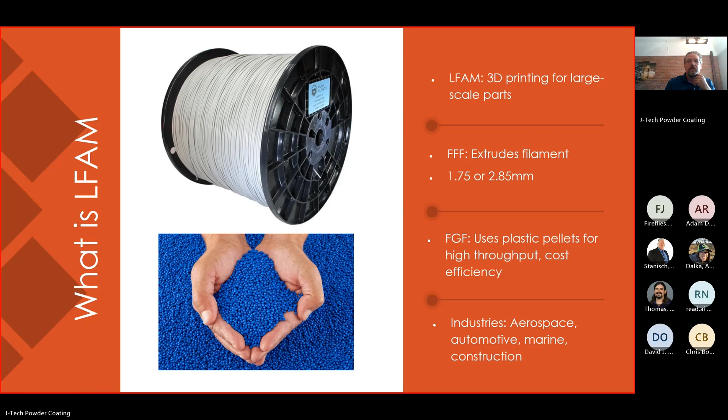So in the quarter to one cubic meter range, these are typically gantry style machines. I mean, there are some Delta configuration printers, but I don't know of any that are larger than a quarter cubic meter. All FFF machines are similar in how the part is created.

Material is laid down layer by layer through a heated nozzle, same way a desktop machine works. The difference is really in the extrusion rate. Desktops typically extrude 10 to 30 cubic millimeters per second, while in LFAM the extrusion rate is up to 200 cubic millimeters per second. There are some very well-known names in this segment, such as Stratasys, Big Rep, and Modix.

But there's also a lot of small manufacturers. The machine on the left is manufactured by Luke's Laboratory from Wrightstown, Wisconsin, and that's priced around $20,000. He's got a nice business going down there. Big Rep sells their studio machine for about $60,000, and the Modix Big 120X, which is a kit, starts at $12,000.

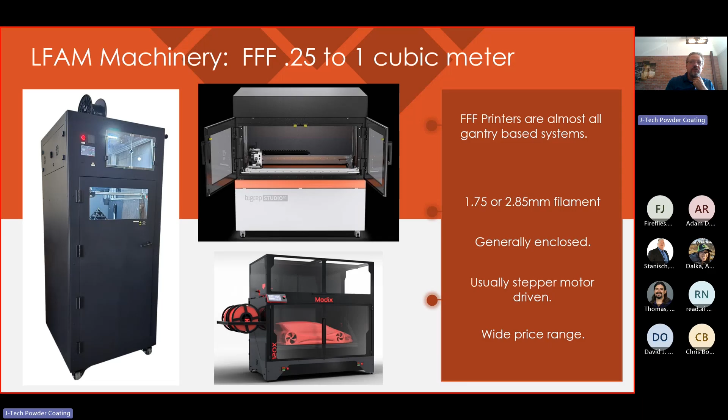Stratasys machines are very well known in the industry, and they're known as the most push-button printer, but they are expensive, significantly more expensive than these. And there's a wide range of features depending on the manufacturer, model, and capabilities.

So the 1 cubic meter market is also typically a gantry style machine with filament or pellet, or a hybrid machine. Hybrid can mean many things in this industry. For some people that's combining filament and pellet printing, or it's combining pellet printing and a router head.

Pictured here is our Compound Dynamics RMC30X. This is a 1 cubic meter build volume. We use Yaskawa CNC servos. It has a heated cabinet, heated filament storage, water cooling, and an onboard Windows PC, so models can be sliced and programmed right at the machine.

This machine can output 200 cubic millimeters per second with filament and over 500 with pellets. Price on this machine ranges from $140,000 to $205,000. There are dozens of manufacturers in this segment, such as 3D Systems, Juggerbot, Big Rep, and several Chinese brands.

Prices in the 1 cubic meter range do vary—as low as $10,000, which is an open air, very lightweight machine, up to $250,000, possibly more.

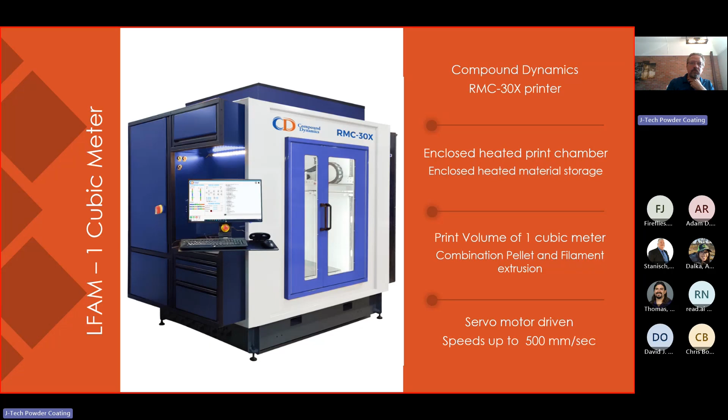So this is getting into more large format. Our size 40 machine is a 2.25 cubic meter. It's possibly the largest fully enclosed heated chamber machine available, but there's always somebody new.

Here in the left photo, you can see this silver dry air component, this is the pellet hopper. All machines running pellets need a hopper for drying out the material. We mount it on the side of the machine to reduce floor space. This is a 15 kilogram hopper, a dry air Arid X10 desiccant style dryer.

With the door open here, this is the dry filament storage cabinet. You have to have dry materials when you're running a large print. Nylon is terrible - if left in open air, nylon will run about 2 hours and then you can't print with it. Prices on this machine range from $220,000 to $305,000.

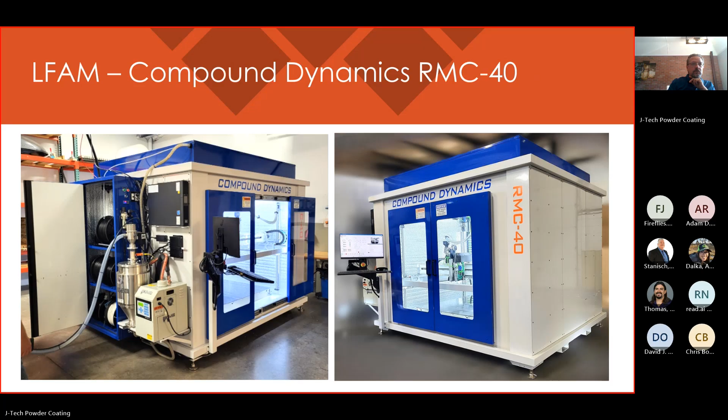End of arm robotics are becoming much more popular. It's a growing segment, probably because of their versatility and very large build volume to price ratio. The two most well-known names in this segment are CEAD and Caracol, although there are quite a few others.

They can be programmed to work with standard slicers, but typically they're using a 5-axis slicing software such as AI Build, so they can do non-planar printing. Prices in this range start probably at the low end of $125,000. The system on the right is in excess of $500,000.

The big advantages with a robot arm is you can do non-planar printing, you have very large envelopes, and your ability to utilize a router head on the same machine. I believe in the back of this photo on the right, that is a router head on a stand, so the robot can go over there and switch heads.

The disadvantages of robotic arms are the overall accuracy. They will follow a tool path, but your actual positioning of the extruder head is not as accurate as a gantry style. And all of these machines print in open air, so they have to have materials that have the ability to do that. Material developments are continuously changing, and they've come up with some formulations that work very well.

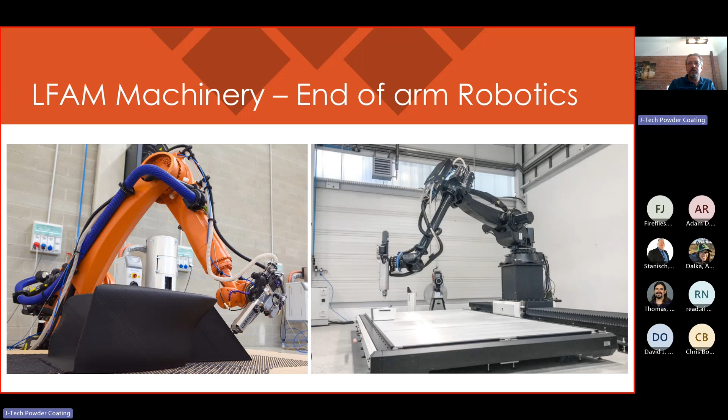Cincinnati Incorporated actually produced the world's largest 3D printer through a collaboration with Oak Ridge National Labs in 2014. The print volume of this series went up to 8 foot by 8 foot by 22 foot with pellet extrusion rates of about 50 pounds an hour. So Cincinnati pioneered the mega-sized large format 3D printing. Unfortunately, they exited the market in 2022, and they no longer produce anything in additive.

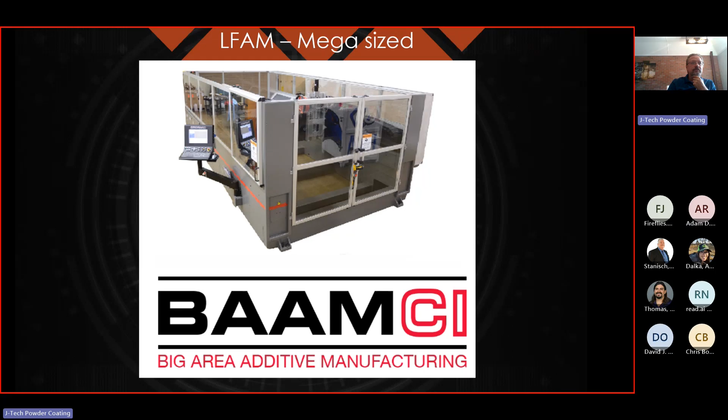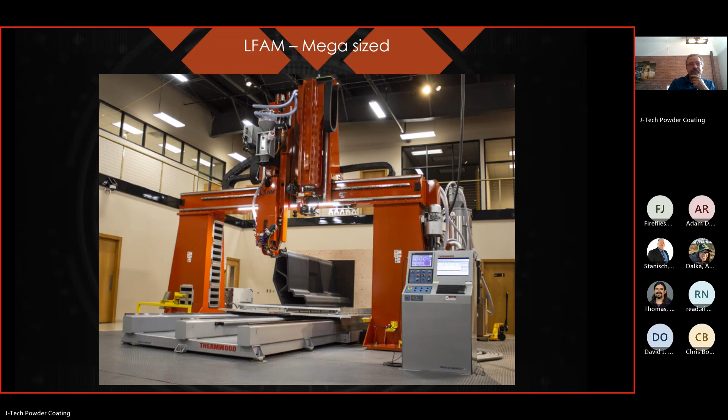They're currently printing at a 500 pounds of material per hour rate. Their goal is to hit 1,000 pounds per hour. They're utilizing these machines for a lot of government contract work, boat hulls, wind turbine blade molds, and other supersized prints. This machine is priced in the millions.

We can't talk about LFAM without talking about concrete. There are larger printers than the Masterprint, but they are not in the composites category. They're using a concrete mixture to print buildings and houses in a layer by layer system that's very similar to composite extrusion, but a very different medium.

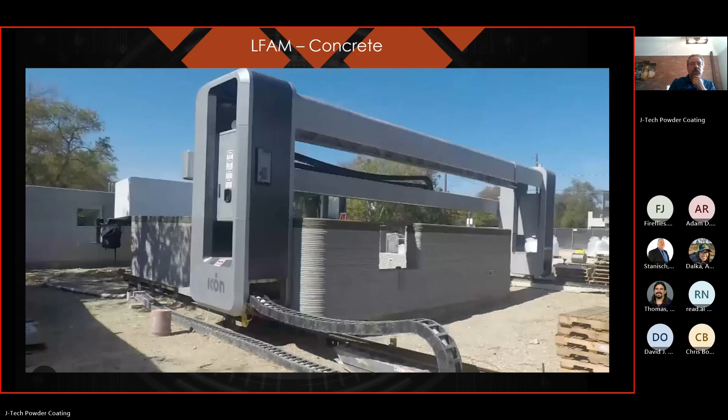At the time this was done, I think it was 2019, it was the largest solid 3D print ever produced. They've produced 2 more - in fact, I think they just finished one last month. The university is also using the machine to print shelters for the military, bridge molds, wind turbine blade molds, etc.

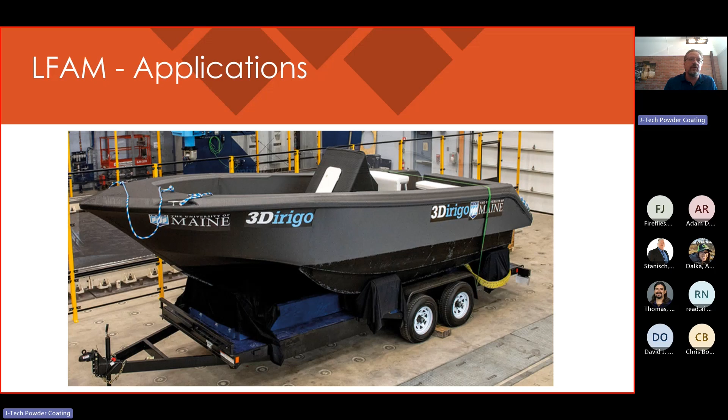Engineering prototypes is still probably the most common use for large format. This is a filament print being done on our RM30. We produced 2 of these to do a test fit and function of the parts for a local company before they invested in final tooling. This is a 1.8 millimeter nozzle with a 0.6 millimeter layer height. Total print time on this was about 28 hours, and this was done with filament.

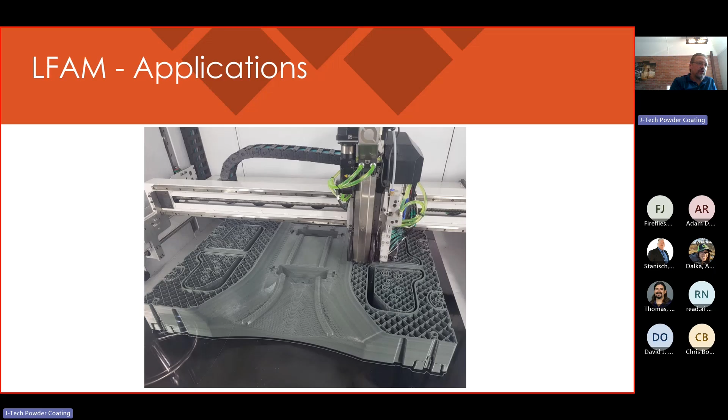There is also final use parts. This is a stator and housing for a hydroelectric power plant in Wisconsin. Cadence LLC is located in southern Wisconsin, and they are pioneering low head hydro for smaller applications. It's a neat group of guys doing some pretty interesting things. The material for this is carbon fiber ABS printed with a 2 millimeter pellet nozzle.

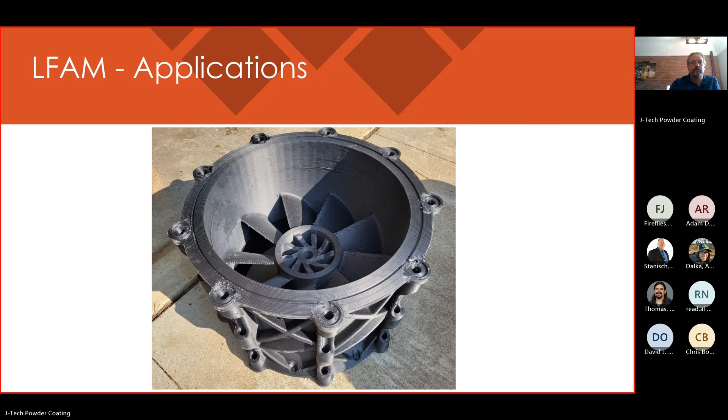There's also final use tooling. This is a punch and die for forming 040 aluminum knee braces. These are nearly solid and took days to print, but the total cost of the print was less than the cost of the aluminum billets they typically produce these from. So it was very economical for them.

This is short run production. They took a long time to print because they were done with a 0.6 millimeter nozzle due to the fine details. It probably would have been more economical to produce them with FGF to a near net shape and then clean up the surfaces in a 5-axis mill. Or actually a 3-axis mill, since they're all straight down. But this is a good example of short run tooling. They can actually run a few hundred parts with these PLA dies.

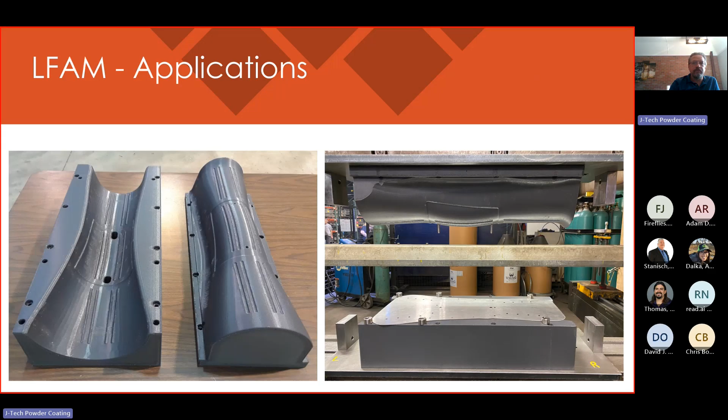Prototype. This is a prototype vacuum mold being done by one of our customers. This customer was purchasing 90 wooden prototype molds a year. Due to the heat of the process, they were only able to form about 10 parts on the wood mold before it was ruined - it would delaminate. So we did some work with them using ABS carbon fiber, and with this material they can do 50 prototype parts before the mold is shot. So it's a big advantage for them.

Their final tooling that they make a mold from is made from aluminum billet, but 3D printing allows them to produce the tooling in-house, resulting in shorter lead times, faster development, and better performance of the product. Their payback on this machine is only about 18 months, so very economical.

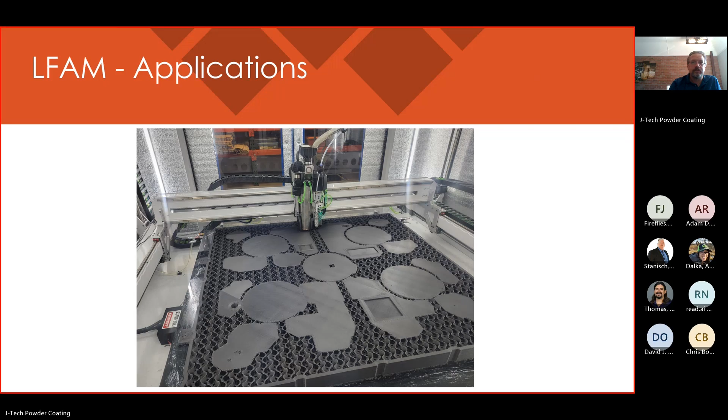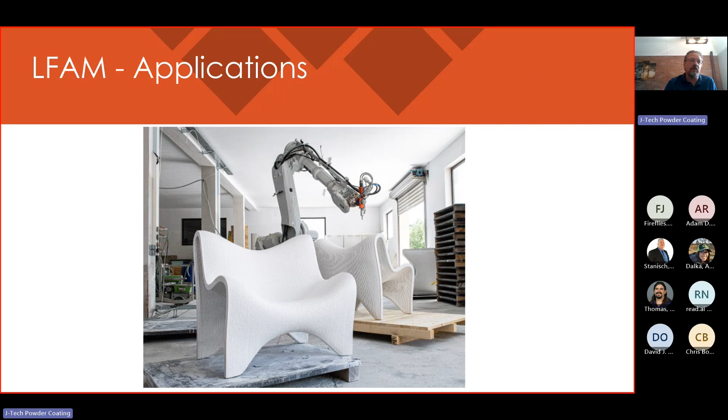Furniture. There are several companies out there now producing 3D printed furniture. I think most of them are using robotic end of arm tooling. The advantage is the ability to produce never before seen shapes, tailor sizes to individuals, and produce on demand, shipping local. Pricing on these is typically in the high-end furniture category, but I think that's going to be coming down over the years as material prices and technology advance.

UAVs. 3D printing is great for fast design development and complex shape production. UAVs can be quickly, cheaply, and produced on site for many applications. It provides great advantages over traditional manufacturing methods. A large printer can be located nearly anywhere and produce the structural components as needed - that really isn't possible with a large injection molding machine.

Materials. LFAM uses filament and pellets pretty much. When printing a very large model, the material cost becomes significant. Printing with pellets opens up a lot of opportunities for cost savings. With prices around 1/10 that of filament, large models become much more economical, and the more quantity of pellets you buy, the lower the price goes.

There's a lot of testing taking place to utilize the lowest cost materials available, mixing something like an injection mold grade, which is high volume and low price, along with an additive manufacturing grade at a 50-50 ratio to reduce the cost of materials more. I'm not going to talk too much about materials unless someone has questions - there's hundreds available.

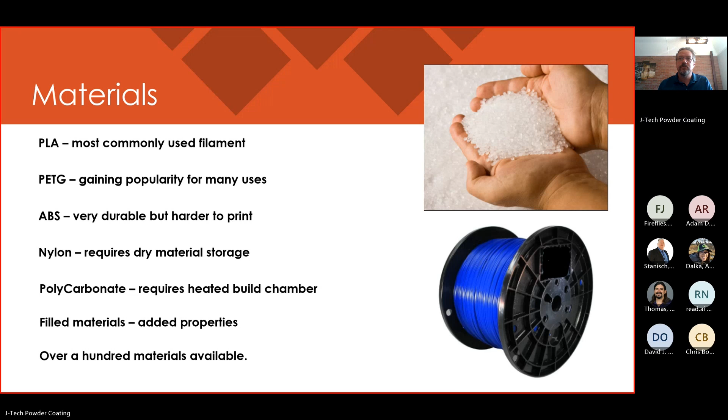On resolution, you've got to think bigger when you're doing LFAM. For printing large models, the number one thing you can do to reduce print time and cost is increasing the layer height and nozzle size. A desktop printer is going to have nozzles of 0.2 to 0.6 millimeter diameter, with 0.4 most typical. Layer heights range from 0.1 to 0.3 millimeters. That's great for creating small detail parts, but results in large parts taking excessive amounts of time - think hundreds of hours.

Our machines run a filament extruder with a range of nozzles from 0.6 up to 2.4, printing much thicker, stronger walls with increased layer thicknesses and high deposition rates. Selecting the largest nozzle size that will work for your model is the way to get your time down.

The pellet extruder has 3 nozzle sizes. They start at 1 millimeter, run 3 millimeters most typical, and 5 millimeter on our machine. The wide spread of sizes means you have a wide range of resolution to choose from. Generally your layer height is going to be 20 to 80% of nozzle diameter - we've done some that was 100%. This allows for a lot of range when programming.

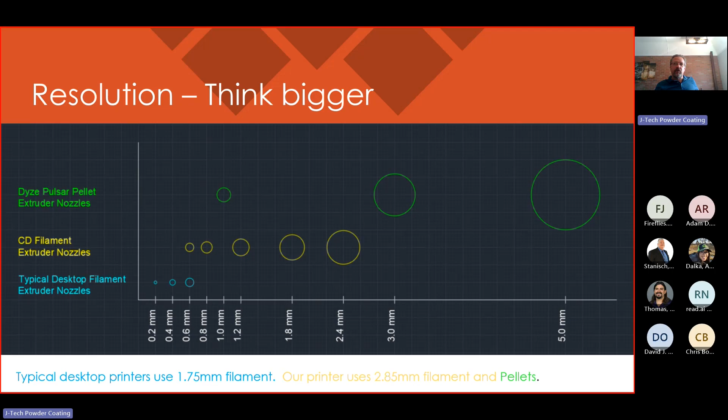Here's what those nozzles look like in real life. You can see the desktop nozzles on the left side. The copper colored ones are the filament, and the silvers are the pellet extruder.

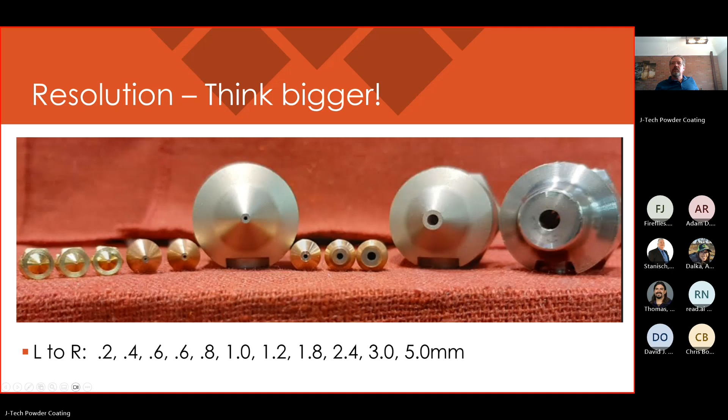So for resolution, think bigger: the thicker the layer, the fewer layers there are to print, and you get a quicker model to produce. Baby Groot on the right was printed with a typical 0.4 nozzle and a 0.1 layer Z resolution. You can see the fine detail this produces—even the tree rings and the feet are distinguishable. But this level of detail comes at a cost of time. Detailed Baby Groot is about a 12-hour print.

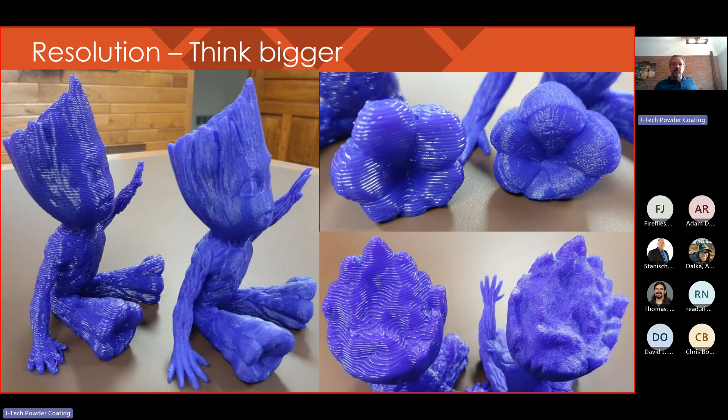On the left is the exact same model printed with a 1.8 nozzle and a 0.9 layer height. You can see the overall shape is definitely identifiable, but the details are lost. This is only a 1 hour print. So you have to select the resolution that produces the desired results for what you're producing.

Now, if you scale the baby Groot up 600% and the layer height were set to 0.6 millimeters, the details would be equivalent to the larger nozzle and layer height. And the print time of this model would be about 36 hours.

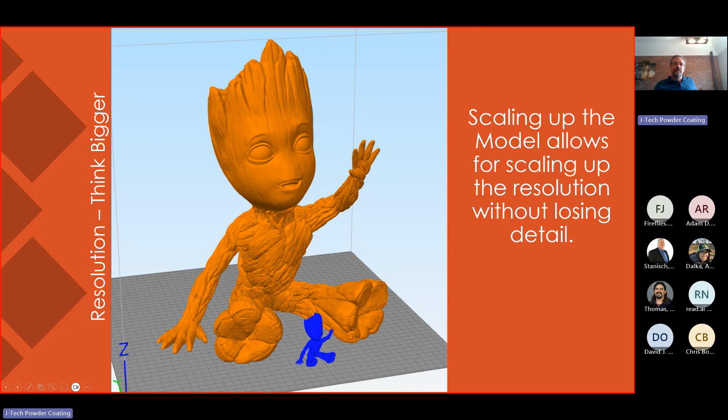Printers with very high extrusion rates also have much larger nozzle sizes and print much thicker layers. This is the Strati, the first 3D printed car, being printed on a CI BAM with a half-inch nozzle and about a 3/16 inch layer.

The resolution is not the most attractive.

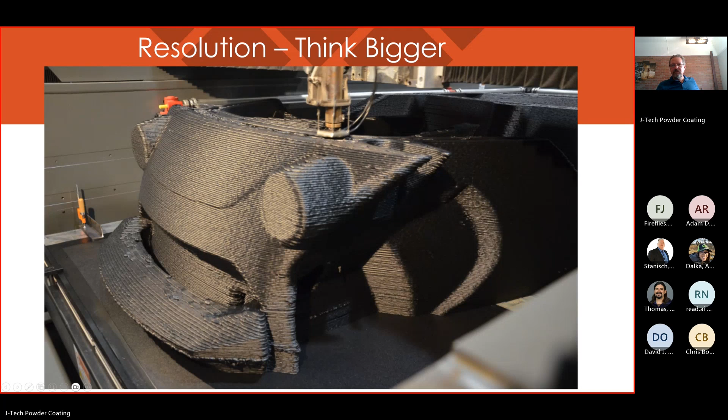Here's the finished product. There was some machining done to fit the lights and other hardware and to clean up the hood, but the overall surface was left as printed to highlight the manufacturing process. Nearly all models completed with high extrusion rates are going to be machined for cleanup—they are really a near net shaped part.

All printing has similar considerations for layer time and cooling. If your layer times are too short, the previous layer may droop. And if your layer times are too long, it may cool down to the point where adhesion is poor, resulting in delamination.

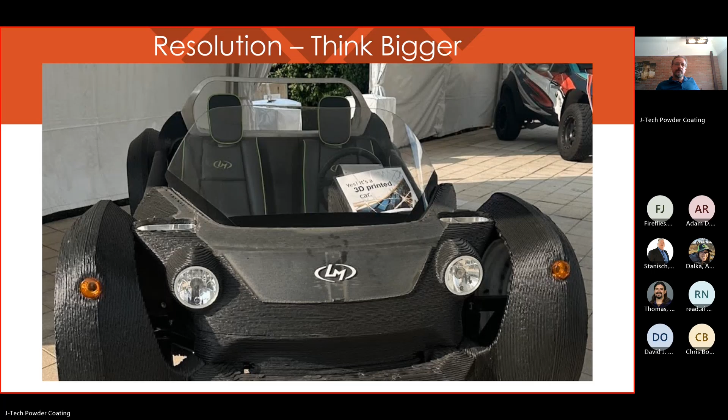Here's a closer view of that body pictured earlier. You can see a marked difference in the surface finish. Things have advanced a lot in the last 10 years, but the surface is definitely not smooth like a typical fiberglass body. So the adoption of as-printed large objects is going to take some time. How suitable would this surface be? How suitable is this surface finish for a lot of other applications?

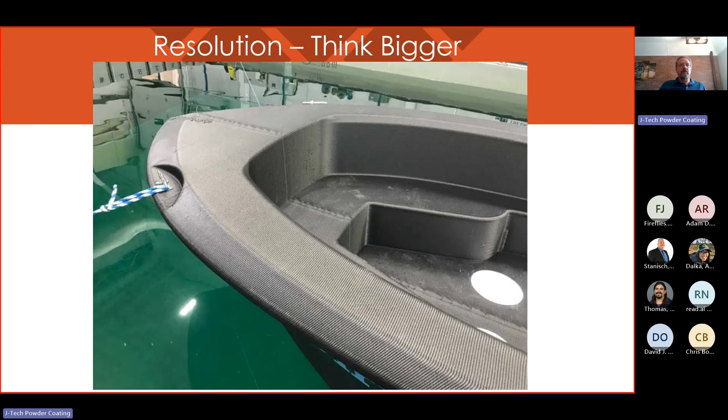The printing workflow for LFAM is pretty much the same as a desktop. Bed prep may be very different. In the really large format, some machines utilize a sacrificial bed board, or they'll print directly on plywood or directly on aluminum. So being a very large format does have its own challenges.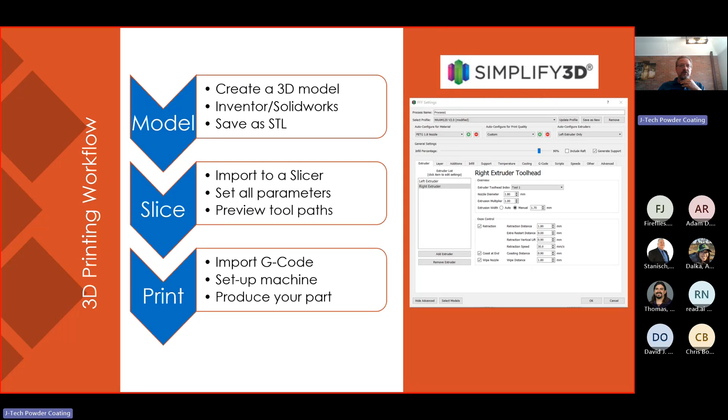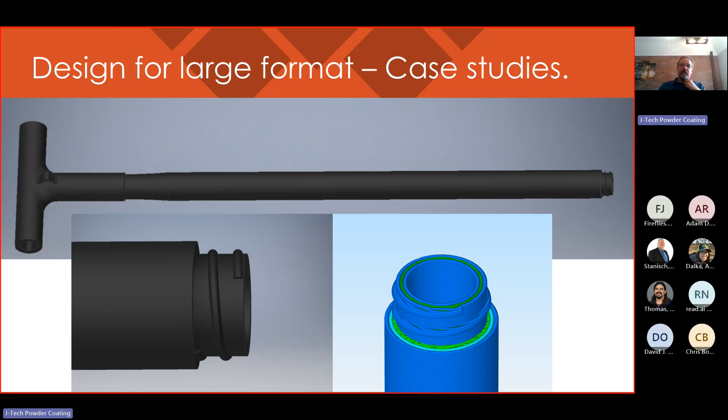So into a case study of how to design for a larger format print. Here's the original handle presented to us by the designer. It looks good—it was designed for a specific purpose. The fine features of the thread required the part to be printed with a very small nozzle and a small layer height, and it had to be printed vertically, which also slowed things down. We were able to print it, but it took too long.

This is the mating part with that. The grill slot profiles and the fine thread required a lot of passes, but it's very printable with a fine resolution. But one of the requirements was to print a pair in less than 2 hours. These initial designs took about 10 hours to complete. So this was a challenge.

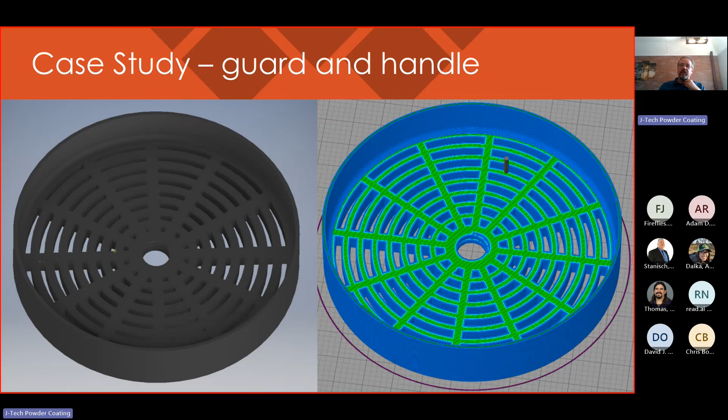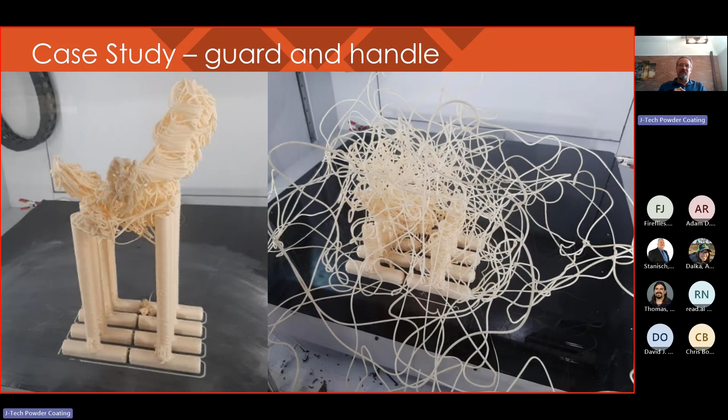We couldn't speed up the printing enough to meet the print goal. So what we did was try to print this with a 3 millimeter pellet and a quantity of 8 parts at once. We're not sure what went wrong here, but obviously not a very producible design.

So it was redesigned to print effectively with large format. We targeted a 1 millimeter layer height. The big coarse 2-lobe tapered thread engages much easier than the fine original thread, holds apart very well. It's also tolerant to variations due to material shrinkage. We added flats on both sides of the handle so it can be printed laying down. And the grill slots were removed from the model, handled with just infill to produce an equivalent free area.

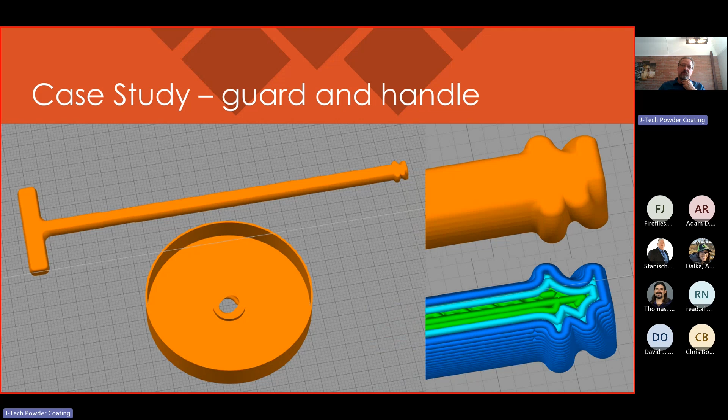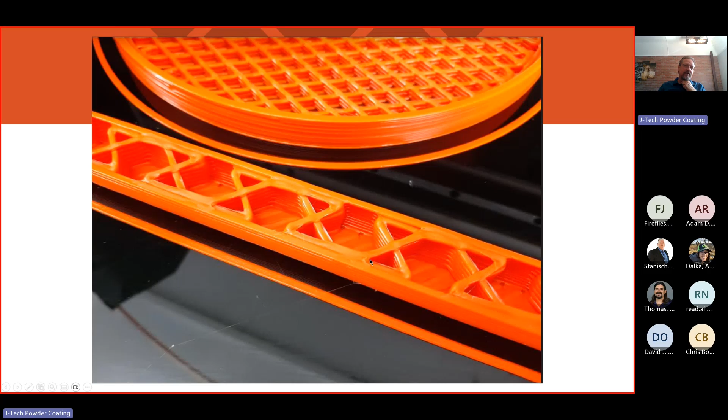And here's the redesigned parts. You can really see how thick the nozzle lines are, and the layers are very visible.

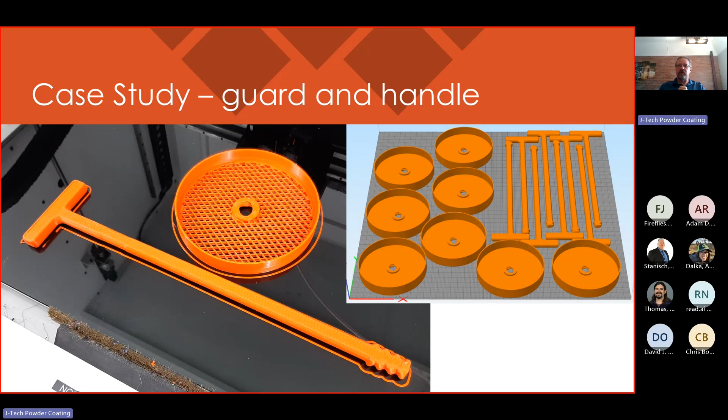The print time for a pair was 1 hour and 24 minutes, and we expect that we'd be able to get that down to about 1 hour per print. 8 of these fit on the bed so that multiple sets can be run at a time. It's really a great example of short run production.

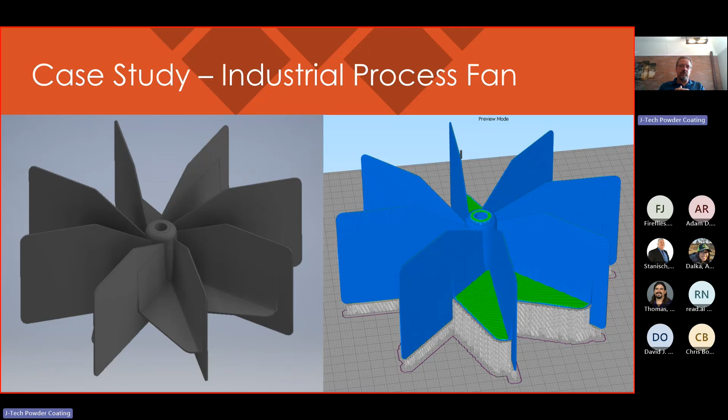To make this a functional plastic part requires a very different approach to the design. Here's the last iteration, optimized for a pellet printing application. It will print in about half the time of the original. As you can see, the blade sections have been thickened for strength. The gussets are blended into the blades, and the blades are curved in 2 dimensions to increase their rigidity. The design flexibility of 3D printing really allows you virtually free added features.

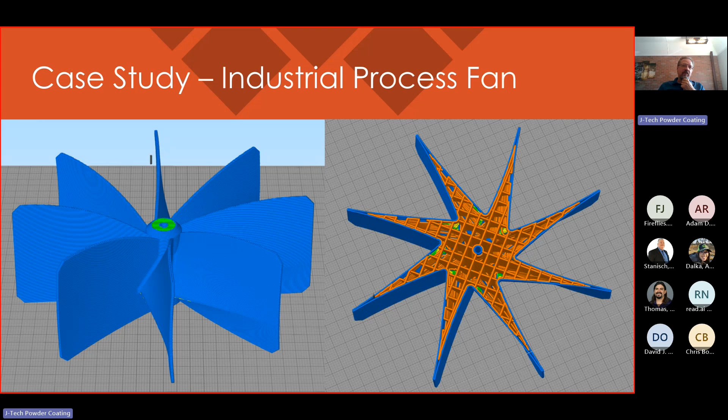Blade thickness was set at 2 times the nozzle width to create a smooth and strong outer shell, and the angles were set so no support material is needed, with one side sitting directly on the bed. We have a lot of options to increase strength on this also, if needed.

And here's the first print of that model. It printed very well, with good accuracy and no warp. One thing that's interesting, you can kind of see where there's a change in the perimeter layers, and they show up as these lines on the outside of the print. That could be tuned out.

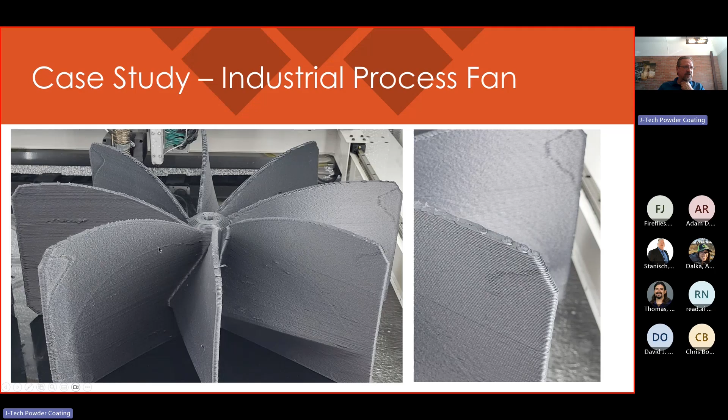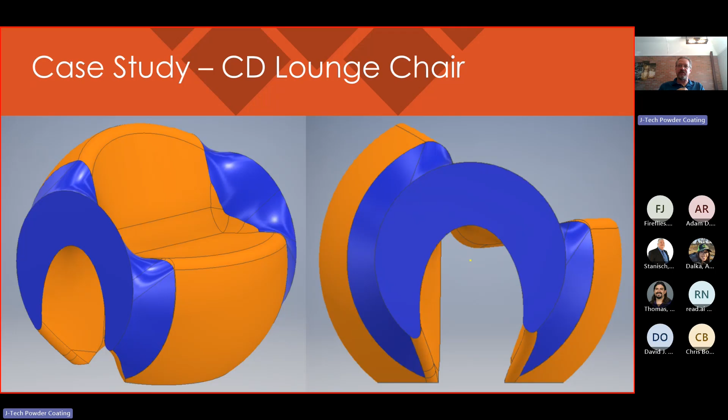This is something a little more fun. We designed a lounge chair, and here's our design. We started with a sphere, made a bunch of revolution cuts, sliced some off, added a few lofts, and kept angles under 60 degrees. Looks pretty nice, but is it going to be strong enough?

Hidden inside, you can see the design brings the 2 outer walls together to provide more strength in the seating area. The left is a section view done in Inventor. You can see it's created as a solid and it's printed in vase mode. This is how most of the 3D printed furniture manufacturers are approaching these designs.

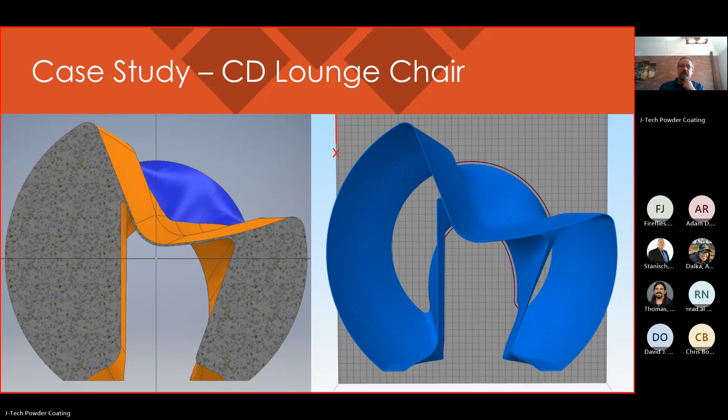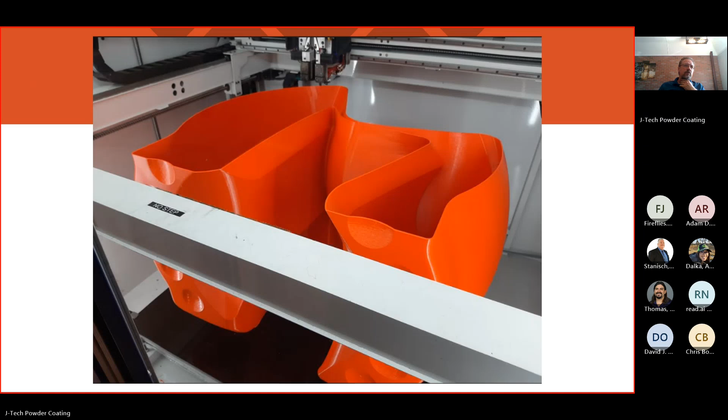Here's a better view of it as it's printing. The wall thickness is about 1/8 of an inch, just one big vase mode print. Total print time was about 12 hours, printed with PETG filament. Material cost for this piece is about $300.

We plan on printing another version of this with our 3mm pellet extruder and recycled PETG or possibly PLA. Material cost in that process is going to be under $60, and the print time should be cut in half, which makes it much more viable from a commercial standpoint.

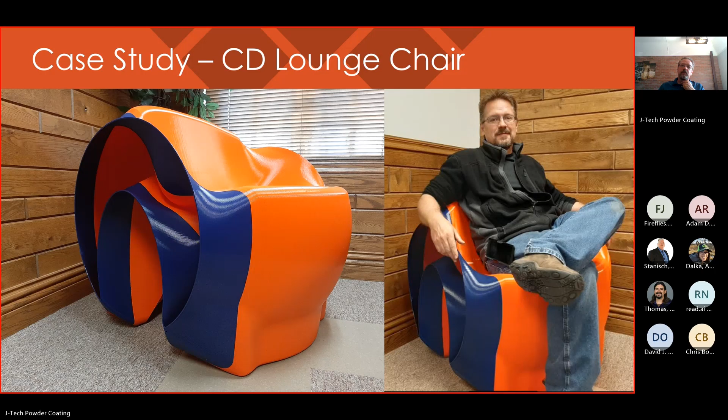For a 1/4 cubic meter part, FFF might cost $500 to $1,000 and take 50 to 100 hours, while FGF could cost $100 to $300 and take 5 to 10 hours. Significant cost savings. With near net shape prints, post-processing like milling or sanding does add cost, but it's often minimal depending on the size. LFAM really saves money by eliminating the traditional tooling costs for production of unique models.

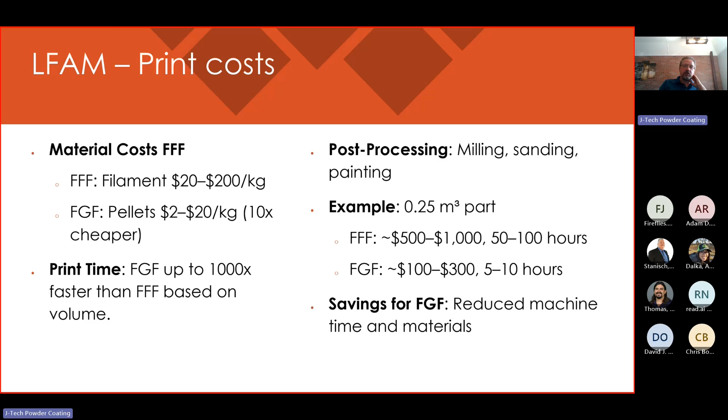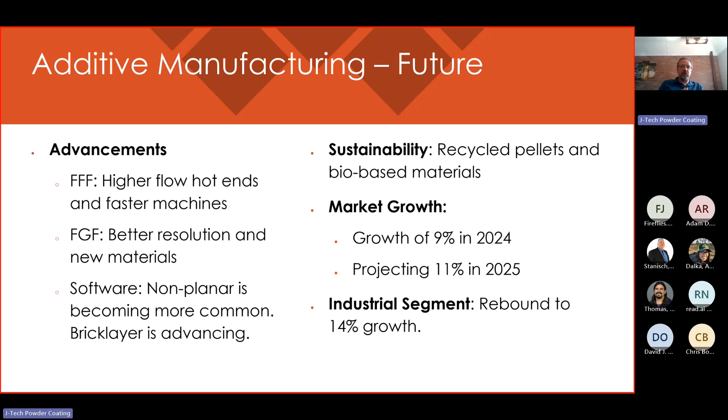So what's the future of additive manufacturing and large format look like? We're seeing improved FGF resolution, new high performance materials that print better in open air with reduced warp, better layer adhesion, and better strength, along with a real push for sustainability by using recycled and bio-based pellets. Overall, the AM market grew in 2024 and is expected to continue the growth trend as more industries adopt this technology. The industrial machine market is projected to have a very good year after a decline in 2024.